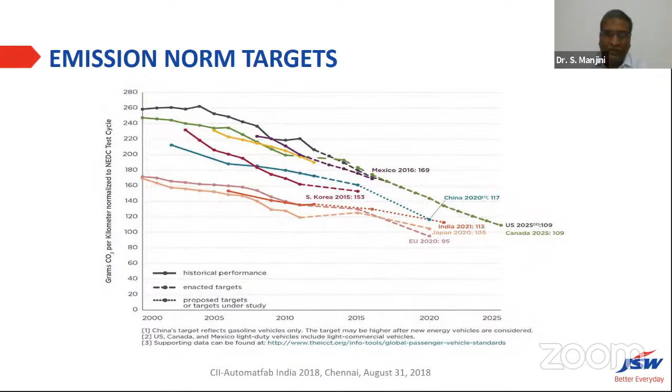But actually, if you see... I think I picked up the wrong presentation. You have to pardon me. Okay.

This is just a comparison of vehicles when we talk about vehicular emissions. The auto industry has been researching for quite some time how to reduce vehicular emissions. The first and foremost solution everybody proposes is the use of electrical vehicles. But in today's context, most of the electricity, particularly in India, comes from fossil fuel.

Of course, when the entire electricity is generated through renewable electric power sources, then vehicular emissions come down to almost one-third, where the emission is only due to the manufacturing of the vehicle.

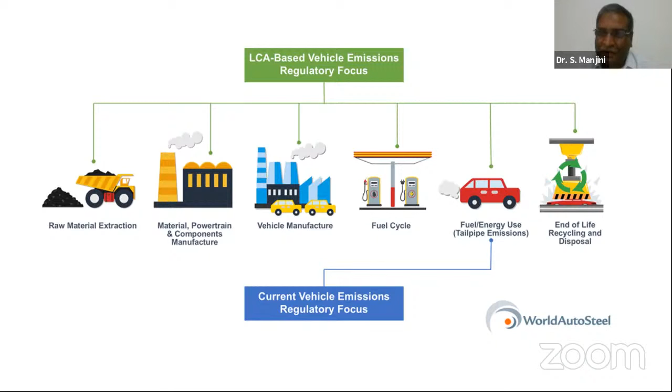So what are the various researches going on? One is the raw material usage itself. The more and more we are going in for recycling material instead of producing the material from raw ore, which reduces the carbon footprint and the extraction cost of the material. Then at the component stage, we are lightweighting the material, trying to replace the material with lighter components.

And next comes the processing of the material itself. Like for example, when you talk about steel, in a blast furnace, we use about 400 to 450 kg of coke for every ton of hot metal produced. I'm not talking about steel here, only the hot metal produced. That means every ton of hot metal we produce, we generate something very close to 1.5 tons of CO2. This is not considering the electrical power and other ancillaries required there.

So if I consider the entire steel production, starting from raw material extraction till the cold roll sheet, we generate something about 3.2 tons of CO2 per ton of steel. So the larger chunk of the carbon footprint in manufacturing comes from the steel production itself.

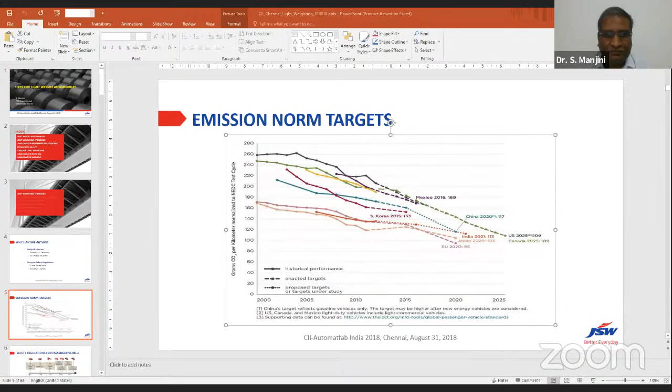Thank you, Dr. S. Manjini. It's a very interesting talk about the green environment. The subject you chose was really wonderful. You talked about waste utilization for the benefit of society as well as environment. You talked about the BS norms and the reduction of vehicle emissions. You shared the various stages where carbon emissions take place, like raw material extraction, vehicle manufacturing, fuel cycles, etc. It was a wonderful talk, especially focusing on the two industries where waste is a matter of concern, like blast furnace slag and steel slag, as well as red mud from the aluminum industry. It's a great concern for all of us to take care of this waste so that through novel processes we can convert it into useful materials. Although AMPRI has expertise in this area, we will see more in the near future. We will be developing novel processes and products useful for society and the environment. Thank you so much once again for your nice and interesting talk, sir.

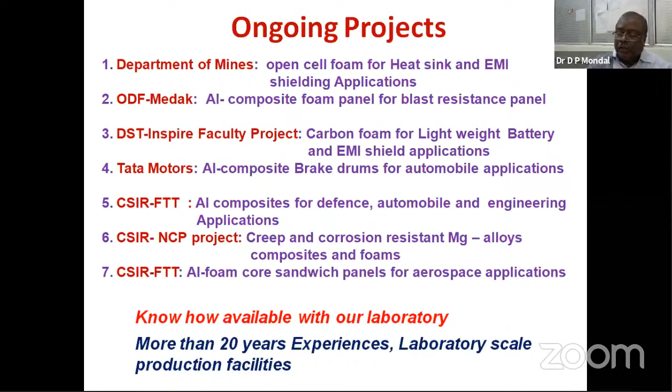Our laboratory can work with other industries, and we are in a position to give licensing of this technology, this know-how, and we can go ahead further to develop these alloys, composites and foams.

If you see, these alloys, composites and foams have a lot of applications - mainly foam is used as a crash worthiness material, and it could also be used for vibration and sound attenuation, also lightweighting of materials. We have seen that if the foam is used as a core, there is a possibility of

around 40 to 50% weight reduction for the sandwich panel or the foam filled tube. There is a need to redesign the chassis or door panels and other things if one uses aluminum foam in cars.

And we found that there is a lot of opportunity to reduce the weight of vehicles by using aluminum foams. Aluminum composites can replace a lot of steel and cast iron components in the automobile sector, and we are mainly working on development of brake drum, brake disc, and connecting rod.

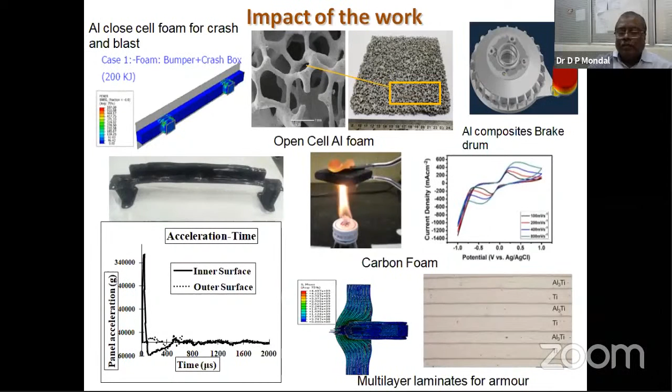As far as our human resources, we are a very small group with 6 scientists, but we are interacting with the scientists of other groups like simulation and also the metal forming and metal processing division. So in total, we are working with 10 to 12 scientists, and these are our other HR profiles. And this department has got awards like the Binani Gold Medal twice. Also 2 of our senior scientists, Dr. Das and A.K. Gupta, received the Metallurgist of the Year award for work in this area. And the other awards we have received.

As far as publications, we have a very huge number of publications in composites, metal foams, carbon foams, and magnesium. And we have filed 15 patents, out of which 5 have been granted. As far as technology transfer, aluminum composite has been transferred to Messrs. Explosive Magnesium Private Limited, Hyderabad, and hammer tips for sugar mills to SN Welding Alloys Limited, Pune, and short fiber preform for making composites through the squeeze infiltration technique, which may be used for development of pistons, connecting rods, and all these things, to Orient Siraul.

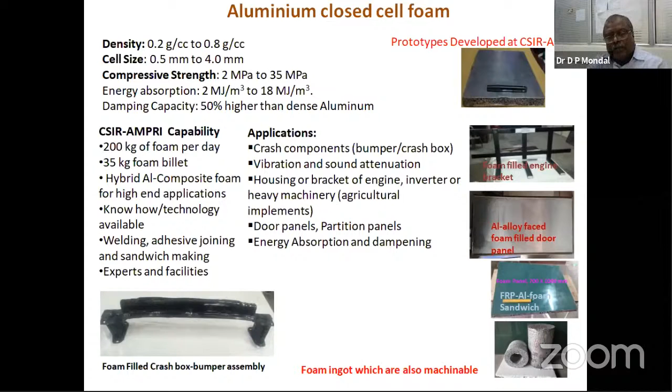Products like aluminum foam core sandwich panels, aluminum foam core door panels, and also channels filled with aluminum foam we have developed. We have made the aluminum foam filled crash box and bumper assembly, which has been tested at ARAI Pune. Property wise, if we compare, our foam is quite comparable, sometimes even better than the Alulight foam.

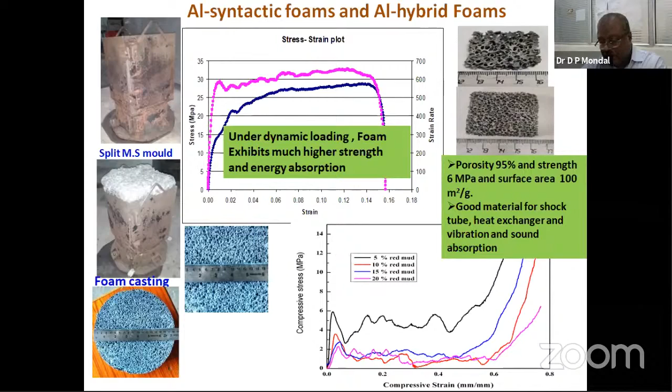And these are the tests we have conducted to see what level of strength can be achieved at quasi-static condition and at dynamic condition. At dynamic condition, the strength of the metal foam is higher than in quasi-static condition. So it can be used for dynamic conditions like crashworthiness, blast, and all these things. This has been simulated and also tested in parallel at ARAI.

At Pune we have found that around 1.5 to 3 kg of foam in an automobile's crash box and bumper can be quite sufficient against the crash when the vehicle has an accident at a speed of 55 kilometers per hour.

So that can be used, but the cost would be increased. If we use the 3 kg of foam for a big car, there will be an additional cost of 6,000 rupees. And the psychology of our people should be that they understand what they are getting using these extra 6,000 rupees, because their car and the persons on board the car will be much, much safer than what the money they are paying for the car.

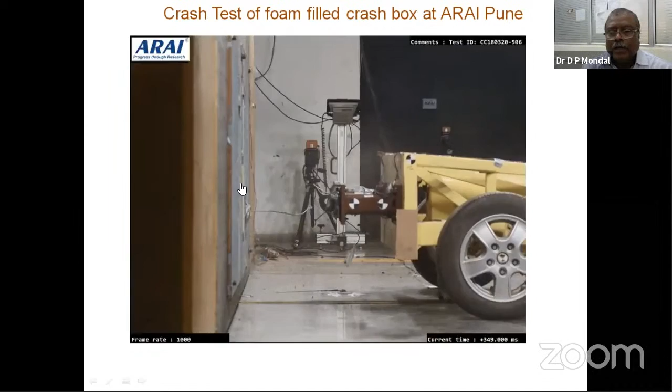And that test we have conducted at ARAI Pune with a simulated crash test, and found that the crash box absorbed the energy and nothing has happened to that assembly. But as that wall is very, very hard and strong, some reverse speed is coming, but that reverse acceleration is much, much lower than what a man can withstand.

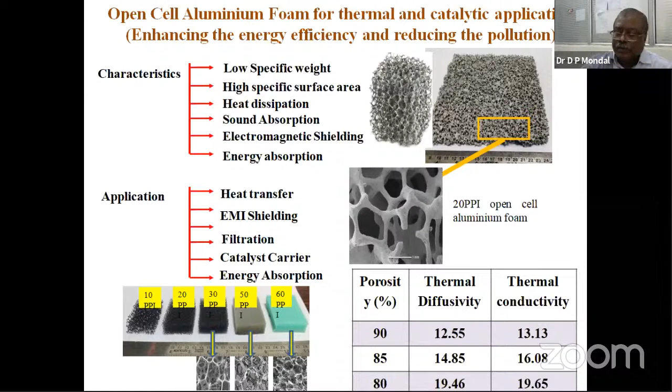And this aluminum foam has been tested for its properties, thermal conductivity and so on. And if we go by the established relations, we found that these values are quite correct as per those relations. We can think that thermal conductivity is low, but if we see, its surface area is around 300 to 400 square meters per gram. So effective extraction of heat is increased significantly. That's why this foam has a lot of opportunity to be used for heat sinks.

The aluminum composites or the magnesium alloys have several applications in automobiles and also in defense, like missiles or aerospace structures. We have the capability to make these alloys, composites, and foam, and we can have a lot of collaboration with industries to make them successful for commercial use.

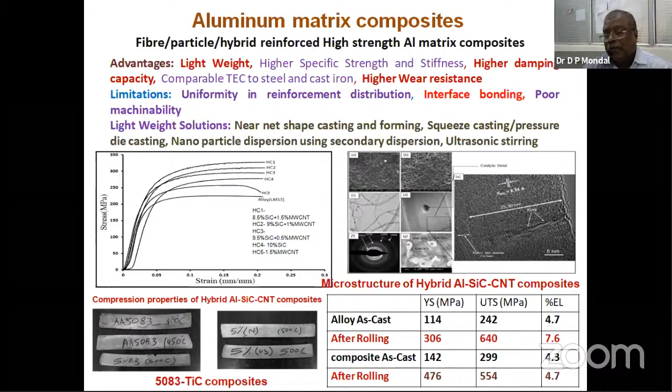And these composites, even with a particle size of 10 to 15 microns, can be rolled successfully. After rolling, the coarse particle aluminum CNT composite's strength reached 554 MPa. And I think this is quite equivalent to a steel of around 1500 to 2000 MPa.

And we have the expertise for texture and EBSD analysis, and also deformation mapping, and we have done the deformation mapping. From there we have optimized the process parameters, and then we have done the rolling of the composite using the optimized process parameters.

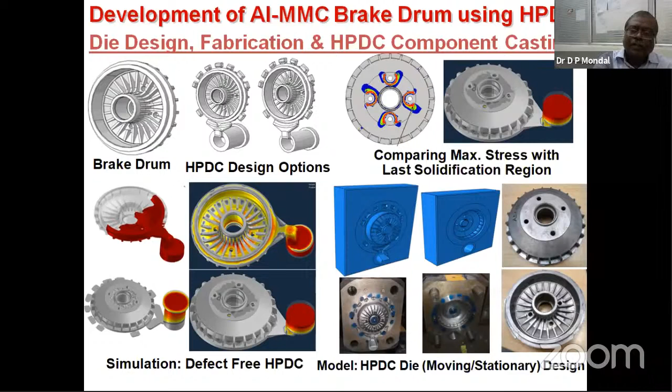From the designing of the die to the manufacturing of the component, that is the brake drum under the project of development of aluminum composite brake drum for Tata Motors that we have done, and we have the expertise in all these areas: the designing of the component as well as the solidification modeling, die designing, and pressure die casting of these materials.

The new area where we are working now is the development of hollow sphere balls, which can be used for making the syntactic foam, as well as a hybrid foam which has closed balls that can give you the closed porosity, and in between the balls there will be very fine pores which are interconnected. Those kinds of foams can be made which have much higher energy absorption and much higher blast resistance capability. It will be used also for sound and vibration applications.

But the main problem is the cost of these hollow balls. Now it is very costly. We are now trying to make the process cost effective to make the hollow balls so that they can be used for making the syntactic foam for various applications.

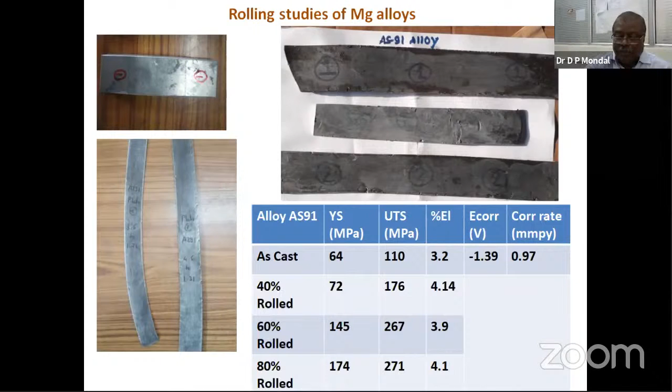The magnesium alloy composites that we have made: even the fine or coarse particles can be dispersed in the magnesium alloy more uniformly than what we can do in the aluminum alloy, because magnesium has better reactivity with the ceramic particle as compared to aluminum. This work we just initiated, and we have done the hardness measurement, and we have seen that hardness of the alloy improved by around 70% by using 10% SiC within the alloy. So its strength and stiffness can be increased significantly by using ceramic particles within the magnesium alloys.

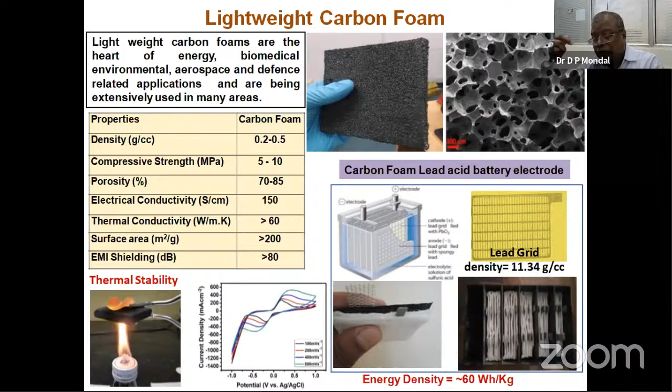This carbon foam can also be used for electromagnetic shielding for defense vehicles or aerospace. Because out of the 80 dB of EMI shielding, its absorption is around 70 dB, its absorption coefficient is very, very high. So it can be used for stealth technology. The reason it is giving this is the multiple scattering of the EMI wave; because of the multiple scattering, the radiation is reduced and absorption is increased significantly.

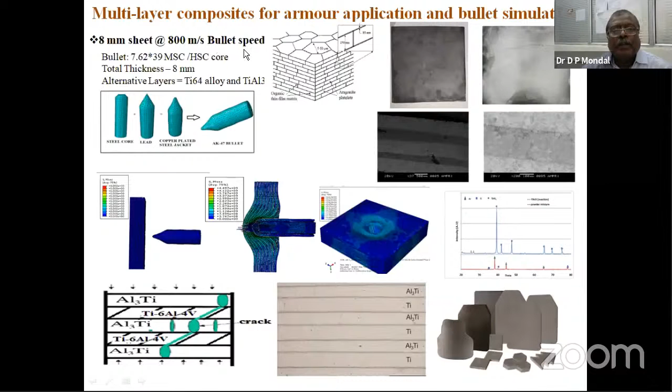And this is some work I already told about, multiple layers of aluminum and titanium for ballistic resistance application for armor. We have seen that 8 mm thickness of this can resist the bullet at a speed of 800 meters per second. That we have already tested. Now we are working in this area: aluminum foam core sandwich panels with ceramic at the front and aluminum alloy at the back for armor application, as well as blast resistance application.

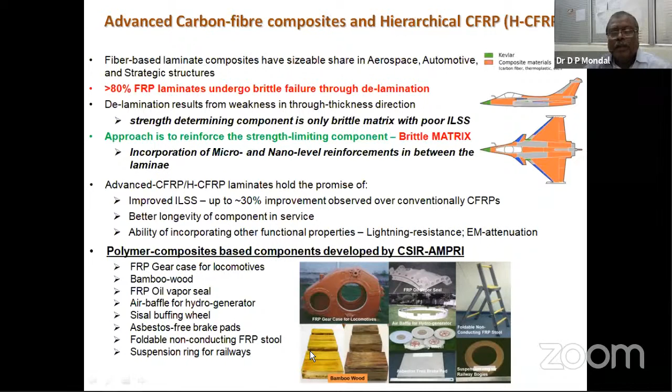Another area is the polymer matrix and polymer matrix composite. We have an excellent facility and excellent expertise of our scientists, and we have developed a number of components for BHL. Presently we are also working with bamboo composite, and this technology has been transferred to some Bhopal-based industry who are regularly making these materials, and they are one of the largest polymer industries in India.

And the other is the hierarchical composite: aluminum carbon fiber reinforced hierarchical polymer composite, fiber reinforced composite. Our objective here is to increase the strength as well as avoid debonding, and that has been successfully developed. This has a lot of opportunity to be used in automobiles, particularly for lightweighting, and also in aerospace structures.

In conclusion, we have demonstrated a number of processes, products, and materials which have a lot of capability for lightweighting of automobiles or aerospace structures. These futuristic materials at AMPRI are well recognized not only in India but internationally. In some of these materials, AMPRI may be the only lab in India working in this area, especially carbon foam and aluminum foam, the open cell metal foam. Even in aluminum composites, maybe at our level, some other lab like NIIST Trivandrum, which is also a CSIR lab, is also working.

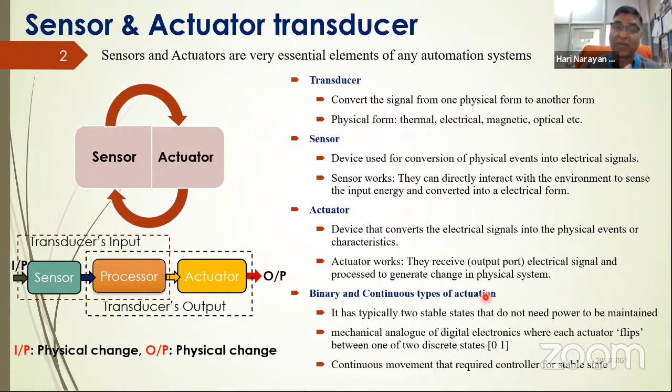Before I move to the AMPRI actuators developed here, I would like to discuss shape memory alloy. Shape memory alloy is a smart material, a class of smart material where two materials are joined together to form the alloy - nickel and titanium. These two materials blend together to form the alloy, and this alloy has a property.

It provides two stable states, which we call austenitic phase and martensitic phase. During the transformation of this material, it stores the strain generated by external force, and then while we apply any thermal, electrical, or stress process, it releases this strain in the form of displacement. While releasing the strain, it produces a lot of stress, which can be used for our actual purpose, for external mechanical work.

These properties make this smart actuator very useful for actuation purposes. Meanwhile, it also has some electrical properties. While actuating by an electrical or joule heating method, it has a change of resistance while transferring between the two phases - austenitic and martensitic. If we can properly extract this change of resistance information from martensitic to austenitic or vice versa, it gives information about their position. That's why we can use this actuator for both sensing and actuation together.

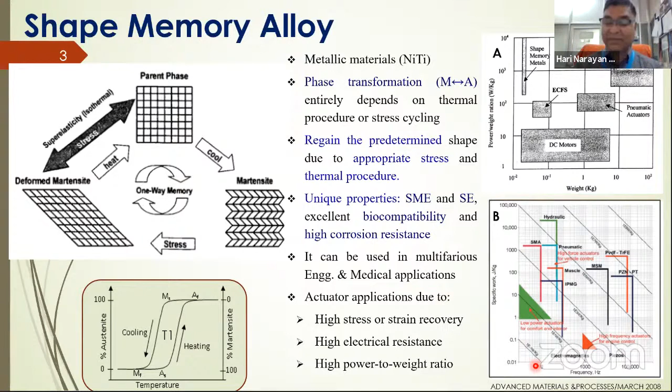So this is a versatile material for use in the coming days for any kind of application purpose. Here at CSIR-AMPRI, this department is going to work on various R&D activities, in which I just wanted to give a brief highlight about the SMA actuator.

We had developed the SMA actuator for 3D printers for micro displacement, a continuous kind of actuator. Another actuator we developed is for a prosthetic hand, which involves movement of fingers to grab any object by the human being.

This actuator is activated by EMG signals connected to the amputated hand. Thirdly, this kind of actuator can also be suitable for orthopedic rehabilitation devices, either in binary kind of actuator or in continuous kind of actuator.

The most important actuator application is for the automobile industry. Initially, we have targeted to develop an actuator for the door, central door lock and unlock system, filler inlet lock as a petrol lid opener, unlatching system, and trunk lock actuator system.

These are in the form of a binary system, because you only need latching or unlatching the system. So this kind of actuator needs a sophisticated electronic system, and we have a very good facility to develop the electronic system for the heating mechanism.

Because the actuator needs a sophisticated heating mechanism system, control mechanism, instrumentation and automation of the particular device, and data acquisition, since no sensor or actuation can work without data acquisition. We have to acquire the data, pre-process and post-process it, and accordingly develop the algorithm for actuation purposes.

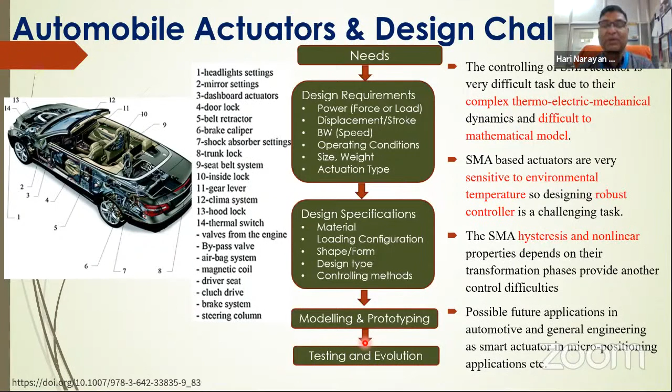Now, after the requirements are fulfilled, we have to model out and prototype the machine, then do testing and evaluation. This is the method and device for how to develop our actuators. These are the steps we have to follow for developing our own actuators, which are going to be demonstrated or discussed in the next slides.

Now, the shape memory actuators developed here. As I discussed in the previous slide, we have developed three actuators, which we can call the fuel lid and latch actuator.

This is a very common kind of actuator currently available in automobiles or cars. There are two levers present below the seat of the driver, from where the driver pulls this lever and opens the fuel lid, as well as the bonnet and trunk of the car.

This is a simple mechanism, but we can also automate the system using the very small actuator which we have available right now. So this can be fitted here. We just have a simple mechanism, simple electronics, and these are the properties of this actuator which make it suitable for this controller.

Similarly, for the door lock/unlock actuator, right now we're using the central locking mechanism using DC motors. This DC motor, which is a solenoid motor, is provided a pulse by our key. The ignition key has two buttons there for opening and closing this central locking system.

Similarly, we can replace only the gun, and the same controller can remain there, which will reduce the weight, as the four guns can be replaced by our SMA actuators.

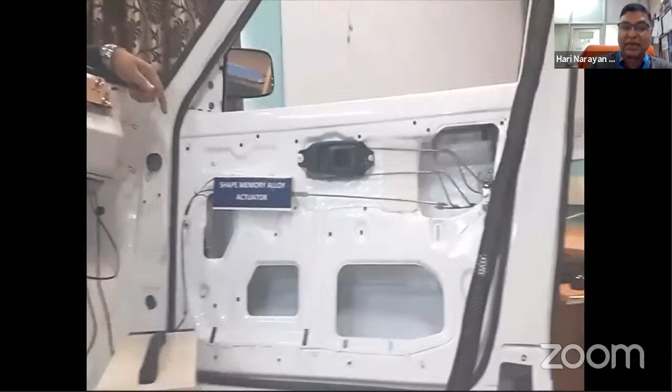This is the door locked by this control mechanism, just like our central locking mechanism. Now we try, and it's not going to open. Similarly, to unlatch it, we have provided two push button switches there, which provide the heating mechanism pulse to the control mechanism, and it unlocks the system.

Right now, presently, the device actuator is very big, but we have to replace it with a very small version, we can say 40 to 60 mm in size, with that mounting capacity.

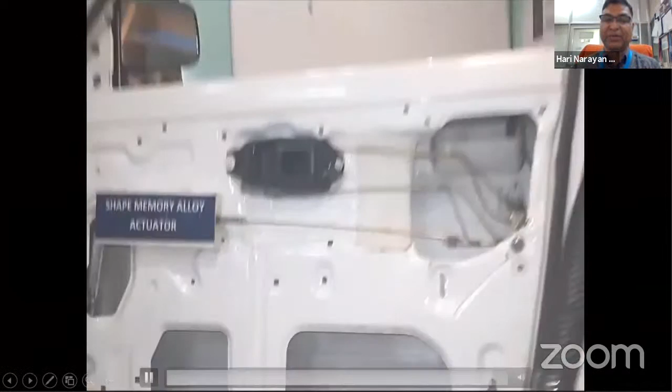This is basically a working prototype here, which we are going to demonstrate. This prototype is also lying within our laboratory.

Now I move to the second similar application for the SMA actuator for a 3D printer. In this project, the 3D printer has a printer head as well as a print pad, and the print pad and printer head have an aligning mechanism. The distance between the print pad and the print head has to be maintained, and that distance cannot be constant throughout the printing process.

That's why this is a continuous kind of SMA actuator. It can be used in the automobile industry where continuous forward and backward motion is required, for example the louvers in an AC vent, to move the vent direction forward and backward. So this kind of actuator can be suitable for that, with just a little modification to accommodate the automobile industry.

So this is our application and specification, from where it can lift a load of 500 grams with a number of elements in the forward and backward direction, and it provides an actual stroke length of around 5 mm. This technology has also been applied for a patent.

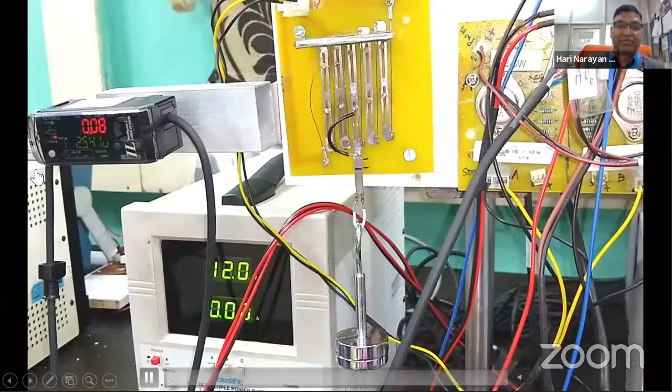This is the characterization technique which we did, and I just wanted to give a glimpse of this video. From here, this is the 5 mm displacement where we apply electrical pulses. This is the motion which will lift a load of around 100 grams, lifting it nicely against gravity, confirming a stroke length of around 5 mm to 4 mm. So this is a very good application for continuous motion.

This actuator has been mounted on the SMA 3D printer, where the nozzle is moved forward and backward through the control mechanism. Here we do not put any external sensor to sense the physical position. This is the motion where the print nozzle, from where the print material comes out in a molten state, is going to print. This actuator maintains the distance between the print bed and the actuator itself.

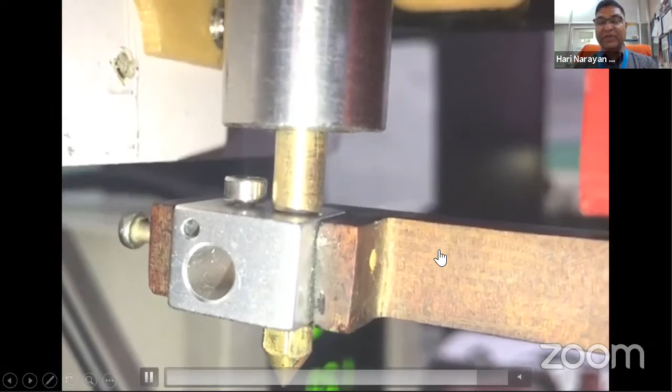Another application of the SMA actuator is for the prosthetic hand. This is also a continuous kind of actuator. We developed the actuator for the prosthetic hand and it's working well. I will give some video demo for that. This SMA actuator can be utilized for any other application, not limited to the prosthetic hand, but because this is the actuator we tested for this particular application, that's why I'm giving this example.

But this actuator can be versatile for any kind of macro position or continuous motion, for anywhere the application is required. It has a limitation of speed, but we can improve the speed.

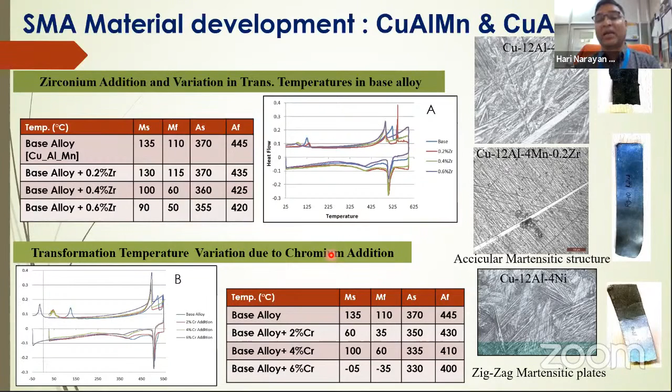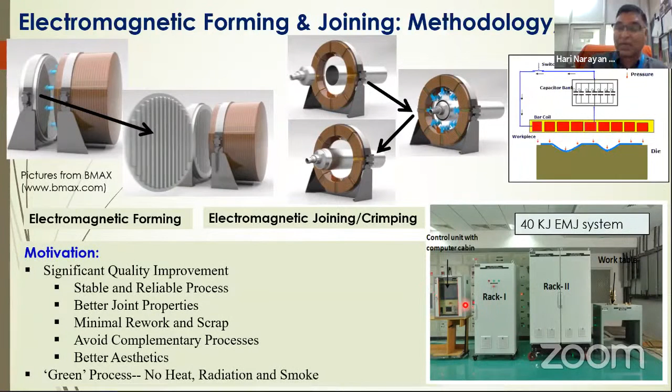This facility can develop a number of components for the automotive industry also. Some of the broad applications are defense, strategic, and automobile: automotive fuel filter, shock absorber, dissimilar joining, drive shaft, dissimilar tubes, as well as lugs for high current or high voltage applications, and sheet metal forming. We can join or weld together copper-aluminum, SS-aluminum, copper-MS, and so on.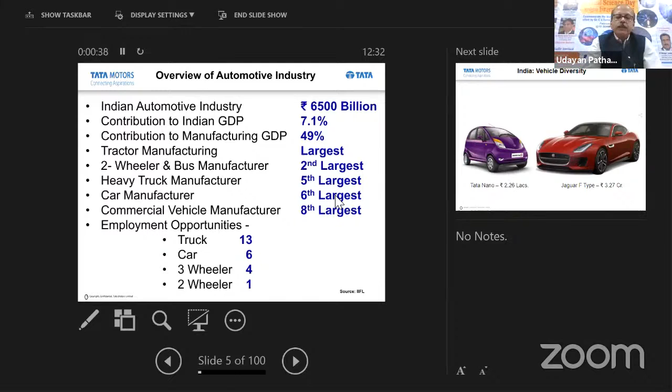Yeah. On the heavy truck manufacturer side, we are the 5th largest in the world. Car manufacturer, 6th largest. As far as the employment opportunities are concerned, for one truck, you get the opportunity of employing about 13 people, 1-3. For one car, 6 people. For a three-wheeler, 4 people, and a two-wheeler, 1 person. This includes the total, right from manufacturing till servicing and end of life.

A very diverse number of vehicles and diverse costs of vehicles are available. On one side, we had the Nano, which was costing 2.26 lakhs on the road. On the other side, the Jaguar F-Type, which is 3.27 crores. So a mix of vehicles available. A difficult kind of usage pattern. Most of these things are very common to all of us, to the extent that if I show you the next picture, which is not the reality, you will still believe this can happen in India. On the off-highway, or if I talk about the tractor industry, this is going to be the picture.

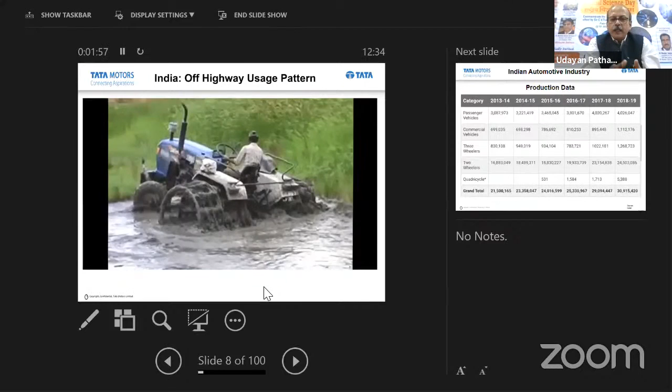This is the tractor which is used typically on the Andhra Pradesh and Karnataka border, where the rear tires are replaced by a steel cage, and this operation is called puddling. You can see the kind of operation that the tractor is doing. It is making slurry out of the mud and water to make the farm ready for the sowing of the rice paddy. This is not done only for the video shooting; this is the regular usage pattern. 90% of the tractors in that particular rice belt are doing this kind of operation.

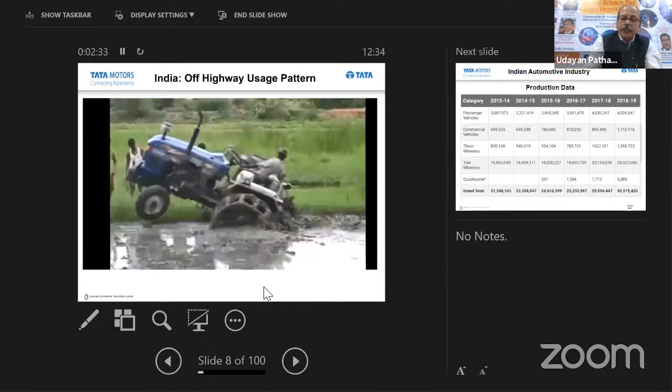And in terms of engineering application, it puts a lot of load onto the differential systems, and a lot of failures are occurring in that area. In the interest of time, I will cut short this video and move to the next. This is some of the production data for the Indian automotive industry. Intentionally, I have skipped the COVID period and I'm showing up to 2019; you can see there is a steady increase in the number of vehicles.

Also, there is a paradigm shift in customer thinking in the automotive industry. Earlier, we were talking about only transportation. Now people are talking about the mobility solution. People are talking about shared mobility, Ola, Uber, share rides; even two-wheeler share rides are very common nowadays, at least in big cities. May not be in the rural or semi-urban areas.

Then another thought that is coming, particularly in big cities like Bangalore, Pune, and Mumbai, where people are spending about 2 hours on the road going to their offices or factories, is how people can use that travel time constructively. So nowadays companies are providing buses with better seating arrangements, and people can use their laptops and mobiles for doing their job. Also, people have now started being willing to pay charges for the shared ride, not only the petrol charges, but a little more than that.

So people don't want to get worried about the parking and maintenance, cost sharing while you enjoy the driving, particularly from Pune when people are going to places like Nagpur and Nashik, etc., where the normal tickets of the buses, sleeper coaches, which are typically in the range of 1200, at the time of Diwali vacations soar as high as 6,000 rupees. Even the aircraft tickets, which are about 3,000 rupees, go to about 15,000, 16,000.

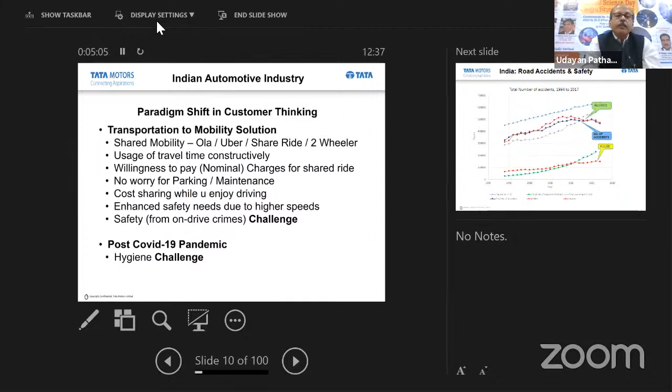Also, one of the things that has happened is even in and around Bhopal, you can see a lot of road infrastructure has improved across India, not only in Bhopal. That increases the speed of the vehicle, which calls for enhanced safety needs. And of course, with all these shared vehicles like Ola, Uber, etc., safety from on-drive crimes is another challenge that is being faced. And post COVID-19 pandemic, hygiene is becoming a challenge, and that is the challenge which the automotive industry is facing.

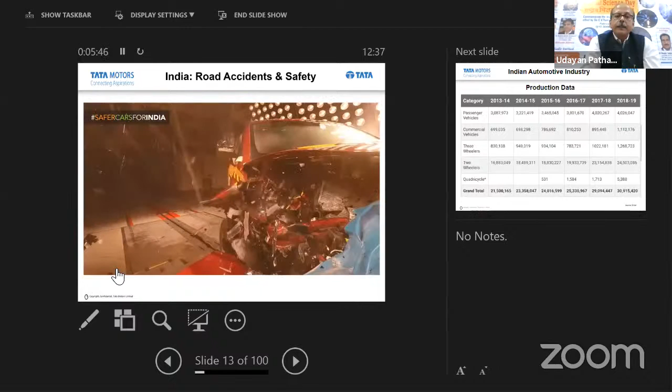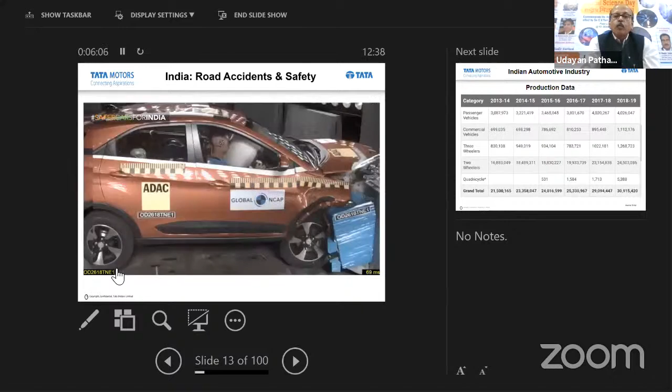So with Global NCAP, Indian vehicles are meeting safety norms. The accidents are artificially made at 64 kilometers per hour. These are intentionally controlled accidents done inside Tata Motors, and you can see the reaction of the vehicle and the reaction of the passenger sitting inside. There are specific cameras which have the capacity of 1200 frames per second. Whatever you are seeing is what in common language we call slow motion. But in reality, this happens in a fraction of a second.

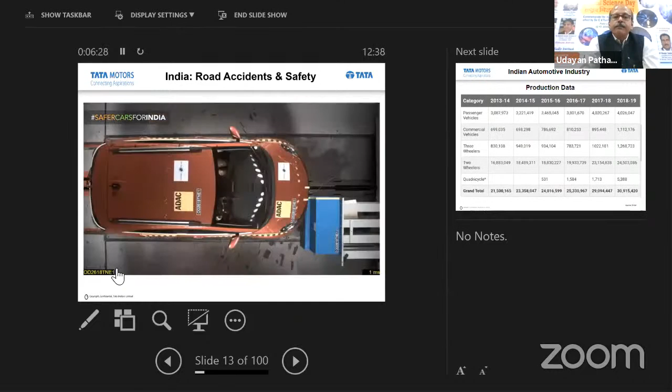You can see what is happening to the occupant and how they are protected, what happens to your vehicle, what happens to even your child occupant, etc. These are real kinds of accidents which can happen on the road. So again, in the interest of time, I will skip this full video.

So the Government of India has come out with a clear-cut policy. Our minister has declared that they want to go with alternate fuel; whether automotive companies want to align with them or not, they would like to go ahead. And some time back, my other colleague, Dr. Manjini, shared the same data which I'm trying to reproduce.

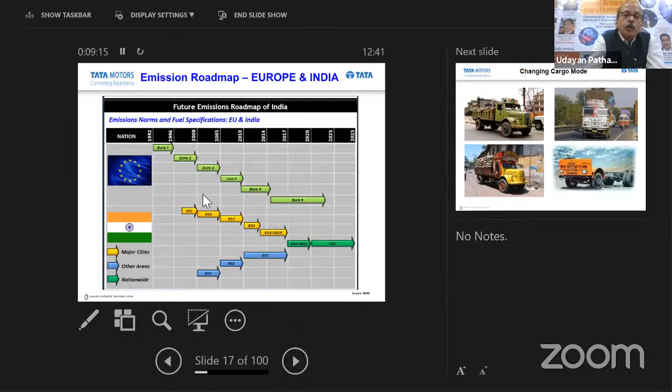Also, there is a changing mode of cargo. Vehicles like this, as you have seen, were moving all across the country. Then came the 407, which was popular for going inside the cities. But with further congestion, the model has changed: between cities, people are going for big trucks with containers and trailers, and inside the city, within the limits of the municipal corporation, small vehicles are providing the last mile connectivity.

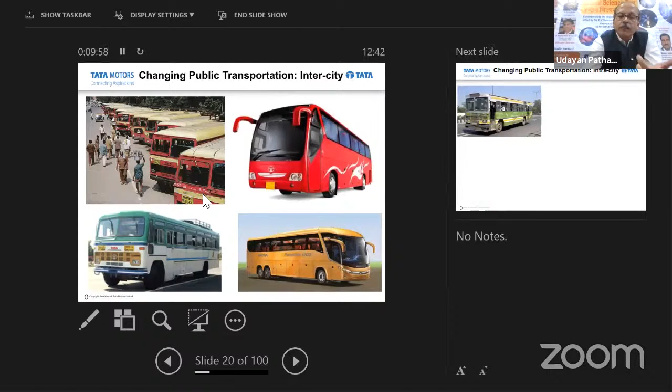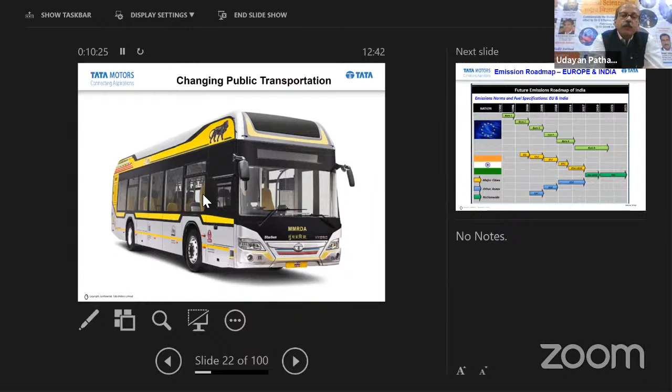Same thing is happening in passenger transportation, intercity and intracity transport. These pictures are from Maharashtra, where buses are being replaced by luxury buses. Even this DTC bus is for intracity travel, and now these kinds of buses are being plied on the roads of Delhi. Even in Bhopal, these kinds of buses are seen nowadays, along with different cargo modes that are available. Even electric vehicles are plying on MMRDA, the Mumbai Metropolitan Region, and you can see these electric vehicles plying. Even between Kanpur and Lucknow, these buses are plying as intra-city buses also.

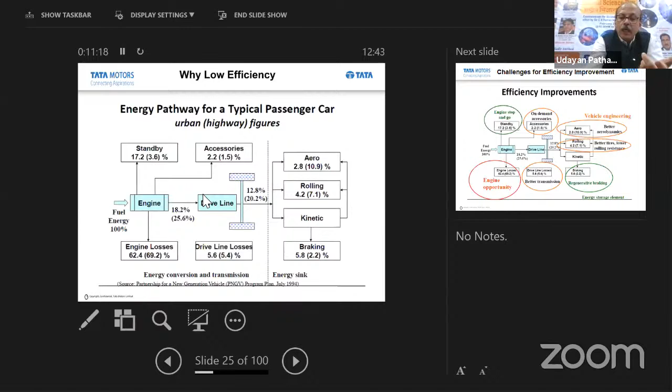This slide I would like to talk a little more about. Why is this low efficiency being talked about? If you talk of the engine, it involves different numbers. In the standby mode, in the urban driving cycle, it talks about 17.2%, whereas the bracketed figures are highway figures. These are the energy consumptions in different systems and subsystems of the vehicle. There are aero losses, rolling losses, kinetic losses, braking losses, and driveline losses. So different losses are there which people are trying to map, and accordingly people from the automotive industry have started working on it.

The ones shown in green have really achieved a breakthrough, such as engine stop-and-go, where we could achieve drastic improvement, whereas in other areas there is only a little improvement. In the case of braking, because of regenerative braking, an energy storage element has come into the picture, and there is actually a creation of energy because of regenerative braking, etc.

Coming to the need for electric vehicles: very clearly, environmental considerations, climate change, fast dwindling petroleum resources, and high current account deficit owing to the huge oil import bill, as I showed in that graph. Then there is a worldwide shift to more efficient drive technologies and fuel-efficient systems. But in spite of that, IC engines are still considered inefficient, and accordingly battery electric vehicles and hybrid electric vehicles have emerged, with their motivations and drivers, migration journey, types and classification, and change content.

This is what we are going to talk about. These are the typical classifications of hybrid and electric vehicles.

If I talk about the first, it is the IC engine vehicle, where the emission is CO2. Then we talk about the parallel hybrid electric vehicle, where there is CO2 emission but in a reduced quantity. Then the range-extended EV, where again partially there is CO2, but the range is extended. Then bimodal, that is independent IC and electric drives both provided there. Then the fuel cell electric vehicle. And if I talk about the zero emission vehicle, it's totally clean — you can see there is no CO2 emerging out of it.

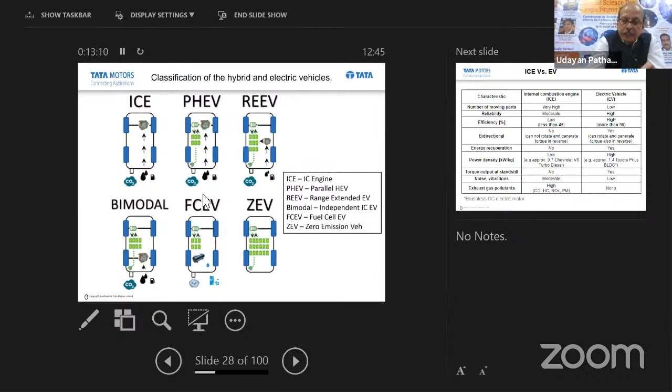When we talk about different characteristics, comparing the IC engine and electric vehicle: the number of moving parts in IC engines is very high, whereas in electric vehicles it is very low. Reliability of IC engines is moderate, whereas in electric vehicles it is very high. Efficiency of IC engines is low, less than 45%, as I told.

And whatever this 45% figure I am showing is with all the improvements that have globally happened. Whereas in the case of electric vehicles, it is more than 90%, even at the crude stage, and there is some opportunity available for improving this further. Then bidirectionality — in the case of IC engines it's not possible, whereas in electric vehicles they are bidirectional. Then power density — again, I have compared two global models, Chevrolet versus Toyota Prius, which uses the brushless DC motor.

The torque output at standstill is not possible in IC engines, whereas in electric vehicles it's possible. Noise and vibration is another area — in the case of IC engines, even with all the different materials developed, like those by AMPRI, we could reduce the noise, but it is still moderate. Whereas in electric vehicles, it is so low that people complain they don't realize there is a vehicle standing behind them. So can we add some noise into it? In fact, it's happening the reverse way, so that is another challenge here.

Then exhaust gas pollution — again, as I said, in the case of IC engines it is CO, HC, NOx, particulate matter, which is high. And in the case of electric vehicles, the vehicular pollution level is very, very low.

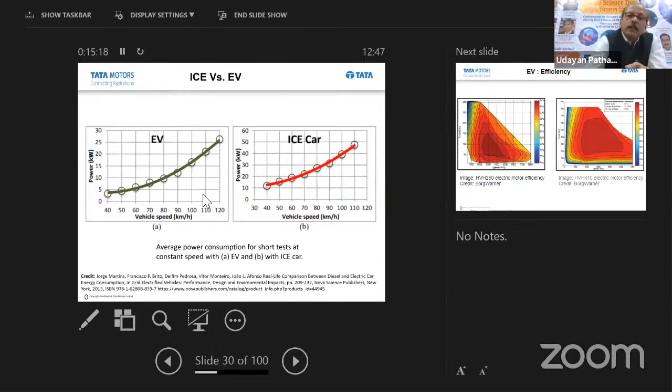Whereas the same change is possible with 25 kilowatt in case of electric vehicle. These are some of the efficiency graphs of electric vehicle. You can see with higher electric motors, the area having maximum efficiency is increasing, close to 94%. This is from Borg-Warner, which is international.

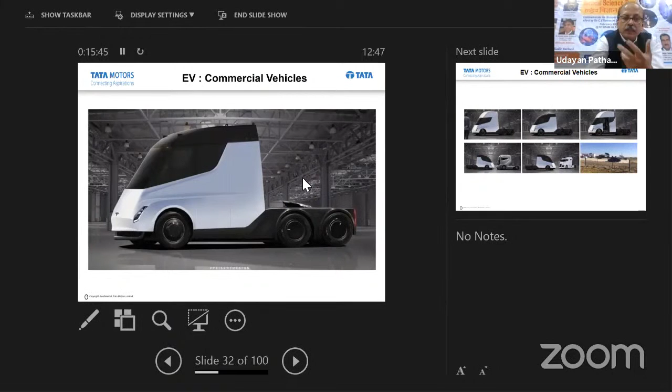In case of electric vehicle, we think it is only buses and trucks, buses and cars that are coming. But Tesla is now coming up with this kind of cargo trucks, very, very high cargo trucks. You can see the testing happening in US, etc.

With this, there may be a question in your mind: when really was the first EV made? You may like to guess, but again, in the interest of time, I will move ahead.

In the 1800s, the electric engine was introduced for the first time, and it was very quiet, slow speed, not scaring to horses and people. That was the requirement at that point of time. This was in London in 1883.

These are some of the later designed cars, some of the car prototypes made by Henry Ford and Thomas Edison, two legendaries.

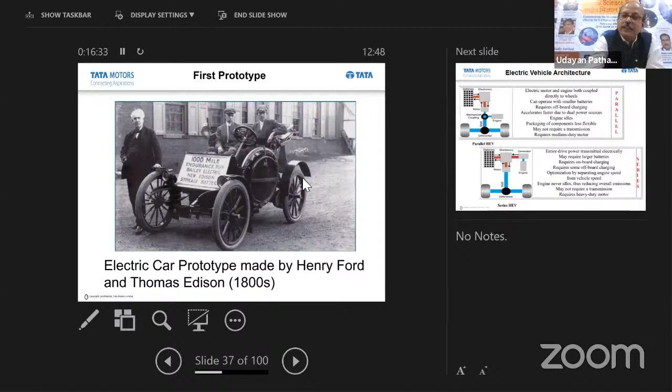Coming to the vehicle architecture, there are two parallel kinds of things: that is parallel and hybrid, or series, we can say. You can see very clearly there are two streams coming differently - that is series hybrid and parallel hybrid. That is the difference that is coming out.

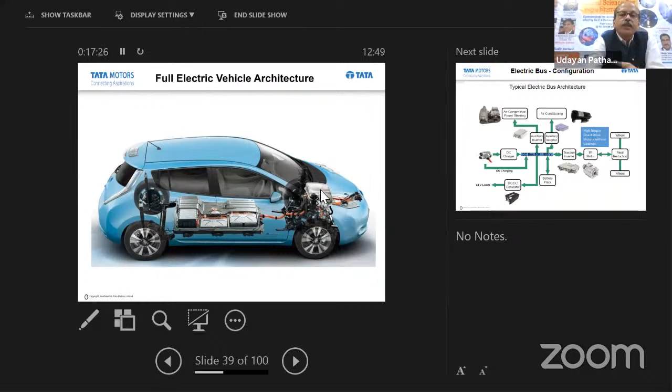If you consider the thing shown in orange color, that is the electric vehicle power flow, whereas the one shown in slightly darker color, that is the IC engine vehicle typically. The other part which is slightly brighter are the batteries and electric storage parts, etc. Then on the bonnet side, instead of engine, there is something called power system unit, which is ECU, engine control unit, which will control the engines.

Coming to the electric bus configuration, we'll go in a little more detail. There are various systems on the chassis, like auxiliary drive, junction box, then auxiliary inverter with DC-DC converter, etc. Then there will be traction motor, traction inverter. Those are the things which I have shown here.

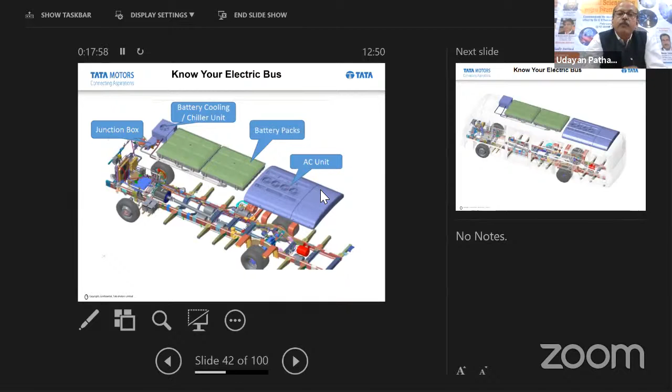When we talk about the roof, there will be battery cooling or chiller unit. The battery packs will be on top, and of course the AC unit is also going on top of the vehicle. So this is how your electric bus will look like.

The global scenario on electric vehicles: the global electric car stock surpassed 5 million vehicles in 2018. You can see the number. Various countries such as Norway, Netherlands, Germany, France, UK have set targets of migrating to total electric transportation between 2030 to 2040. Our country, India, also has focused on electrification of transportation.

Various vehicle manufacturers such as Volvo, Daimler, Volkswagen have announced plans to go only for electric powertrain for future models. That means they have stopped the development of new engines in the world.

As per the forecast by International Energy Agency, the electric stock will be around 70 million by 2025. World Bank already stopped the financing of upstream oil and gas projects after 2019, and they have raised funds to finance the shift towards clean energy. So oil exploration and oil refineries will not be funded by the World Bank anymore - it's already stopped in 2019.

Global electric bus stock: the authentic figures are available from 2008 up to 2018. About 4,60,000 buses are available globally. Of course, China accounts for 99% of the global market of electric buses. Shenzhen city operates the largest fleet of 16,000 electric buses in the world.

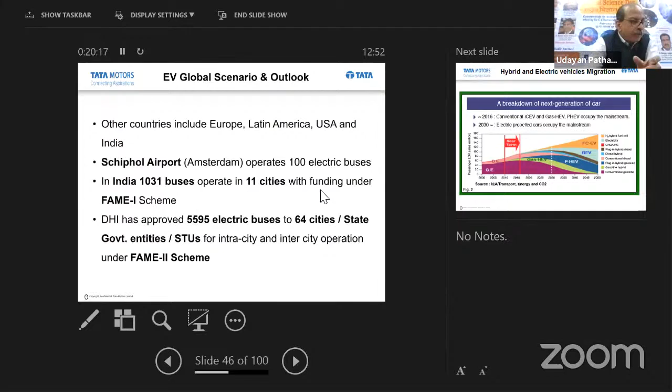And it's not only the number which are on paper, but these are the actual reality that's happening. If we talk about the kind of distribution of vehicles which is going to happen, around 2050, most of the vehicles you will see will be fuel cell electric vehicles. There will be some battery electric vehicles, some plug-in hybrid electric vehicles, and gasoline engines will practically be dead. That is what is expected.

Then if we talk about electric vehicle content, I have tried to compare the gasoline vehicle system, what is their function, and what it's getting replaced by in the electric vehicle. So the gasoline tank, which stores the energy to run the vehicle, will be replaced by the battery. The fuel pump, or gasoline pump, which replaces energy to run the vehicle, will be replaced by the charger. Then the gasoline engine will be replaced by the electric motor.

Then the carburetor will not be there; instead there will be a controller. There will not be an alternator, but there will be DC-DC converters and DC to AC converters, which have no equivalent system available in the gasoline vehicle. And smog control is required in case of IC engine vehicles because there is toxicity in the exhaust gases. In case of electric vehicles, the toxicity will not be there.

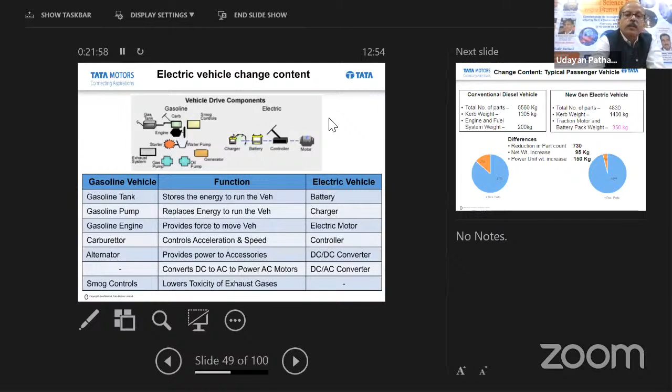If I talk about the number of parts, whatever I've shown today before this slide was kind of qualitative. Here I'm trying to get the quantified data, and the total number of parts is going to be 5,560 for a conventional diesel vehicle, and this is not kg, it is actual numbers. Curb weight is 1,305 kilograms.

Whereas in case of electric vehicle, it will be 4,630 parts, and you can see there is a weight penalty, going up to 1,400 kg. One of the reasons is the battery pack weight instead of the engine and fuel system, which is about 200 kg in the conventional diesel vehicle, particularly cars and SUVs I'm talking about. The new generation electric vehicle battery pack weight itself will be 350 kg, so there will be a penalty of about 150 kg on this.

The reduction in part count is 730. Net weight increase is 95 kg. There's some offset happening, and power unit weight increases by 150 kg.

These are some of the phase-wise manufacturing programs which the Government of India has proposed. Again, in the interest of time, I will skip this.

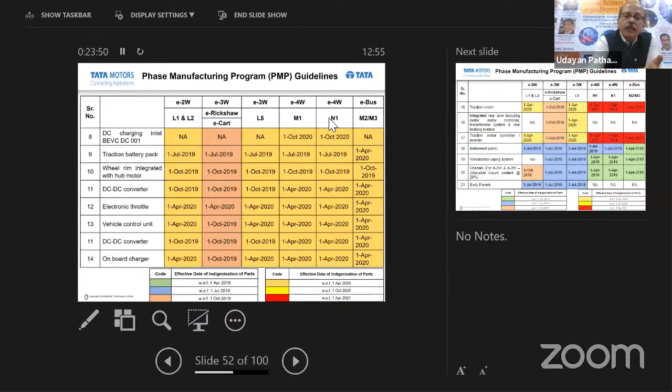This is trying to show how the government has planned a phase-wise manufacturing program for different systems, to make sure that for electric two-wheelers, electric three-wheelers, electric four-wheelers, and electric buses, these parts and systems will be developed and localized in India under the Atmanirbhar Bharat scheme. These are some of the dates shown, and except for those in the COVID era, which got delayed, other dates are being honored as of today.

Again, the same thing: there are about 21 systems which are being localized. Then India's new EV program, the government is focused on the electrification of transport, as I said earlier.

Early EV penetration in the transportation segment includes e-rickshaws, e-autos, e-taxis and buses. In Bhopal itself, we can see there are a lot of e-rickshaws, and I guess a lot of cities in Madhya Pradesh also have these kinds of vehicles available. Then EESL has floated tenders for 10,000 electric sedan cars and 2,000 Bharat EV chargers in the market.

The infrastructure is getting available. The Department of Heavy Industry has introduced the expression of interest for STUs, state transport units, for electric bus operation and public charging stations. Another thing being talked about is the swappable battery, which is a separate vehicle and energy business, and how private vehicles can leverage this ecosystem. That is the focus of the government.

Also, there are some innovative business models coming up, like swappable batteries versus fixed batteries. Recently, the government has passed a resolution that even electric vehicles can be booked without the batteries in them. Batteries can be bought separately.

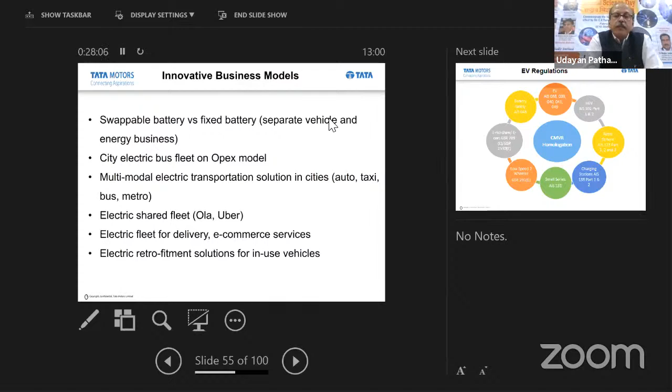Then there's electric retrofitment solutions, for the in-use vehicles, because we already have a lot of vehicles in our country, so we just cannot throw them off. So people are talking about electric retrofitment. Bharat Forge is working in a big way on this particular kind of technology.

Of course, when there's a new changing technology, it has to have regulation, because we are talking about electric vehicles and they have a lot of energy stored in them. If I talk about the kind of energy, it is almost as good as a 1-ton bomb you are sitting on. But let me tell you, it is very, very safe.

There are a lot of safety regulations, what we call CMVR homologation. Tata Motors or any automotive manufacturer in India, or rather in the world, cannot bring their product without getting certified from agencies like ARAI, etc. So there are a lot of stringent safety norms being provided, and standardization is being done. These are the different electric vehicle regulations being used. I have given the comparison of Indian standards as well as international standards.

Again, charging regulations are coming. There can be AC conductive charging, or there can be DC conductive charging. Both types of chargers will be available, and again, each has some plus points and minus points.

This is a very common picture. When we were first introduced to lithium-ion batteries, we had different kinds of chargers. I myself had an iPod at some point, then I had a Samsung, then mini USB and Sony Ericsson. So instead of having 3 or 4 different kinds of connectors, I used to buy this 10-in-1 USB charging cable. But remember, that was about milliamperes, and in the case of electric vehicles, we are talking about kilowatt-hours. So there's a huge change in the energy, and these small cables will not work out.

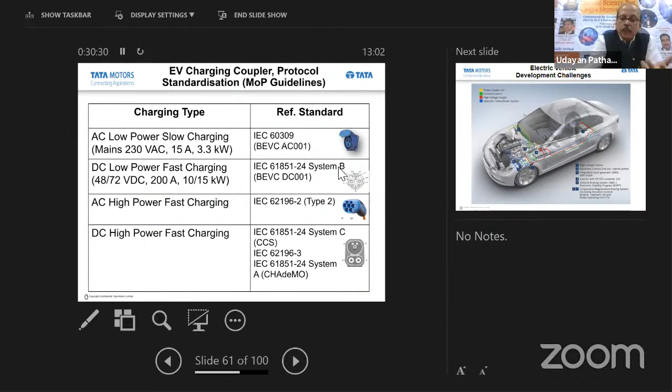So standardization is happening, and these are various reference chargers being used, particularly for charging coupler protocols. In India, the last one, called CHAdeMO, is particularly adopted for DC high power fast charging, and that is being standardized all across India.

Then, regarding development challenges, there are a lot of opportunities available in terms of high efficiency batteries, electronic control units, motor generators, DC to DC converters, and DC to AC converters.

These kind of opportunities are available. I will just show the EV powertrain development cycle.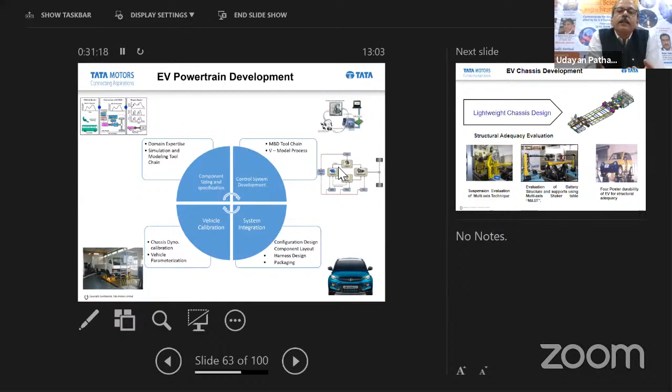It starts with the domain and domain expertise, then the simulation and modeling tools chain. That is the first step. Then we migrate to the actual tool chain, then model process, then the actual configuration of the design, harness design and packaging, and finally productionizing. So these are the various steps into it.

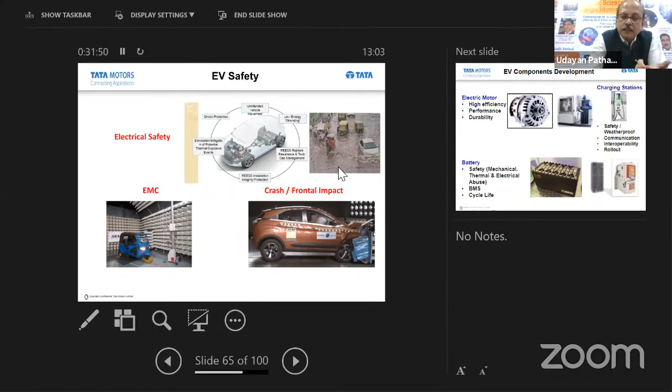In the electric vehicle, lightweight chassis design is happening, and I think AMPRI can definitely contribute in a big way. ARAI is working on structural adequacy evaluation particularly on this. Then there's electrical safety and EMC - sometime back Mr. Bhargava indicated about the EMC readiness which AMPRI has, so those can be leveraged.

These are the various EV components which are being developed and will be developed very soon. These are the business opportunities that will be available - electric chargers, particularly. If you go to automotive companies producing electric vehicles, in their dealerships you will find this kind of structure already available, and very soon these kind of structures you will see even at petrol pumps. Again, the most important thing required here is the training of users and drivers.

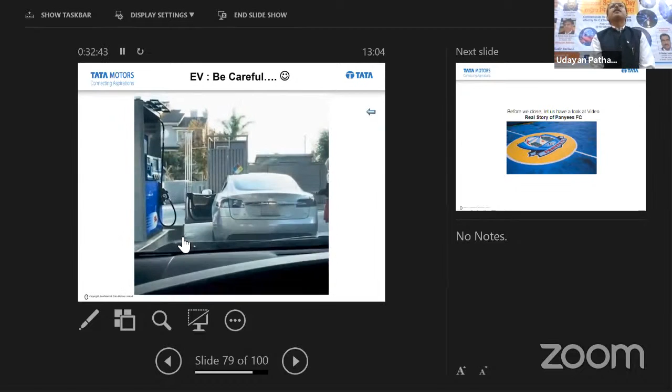I am going to show a small video. This is a video of a lady, but don't laugh - it has nothing to do with gender, but this is the reality. When you don't know, when you're migrating from a diesel or gasoline vehicle to an electric vehicle, and you get the indication that your fuel is towards the end, and you go to the petrol pump or fuel pump, what will happen? You can just see the reaction of this lady.

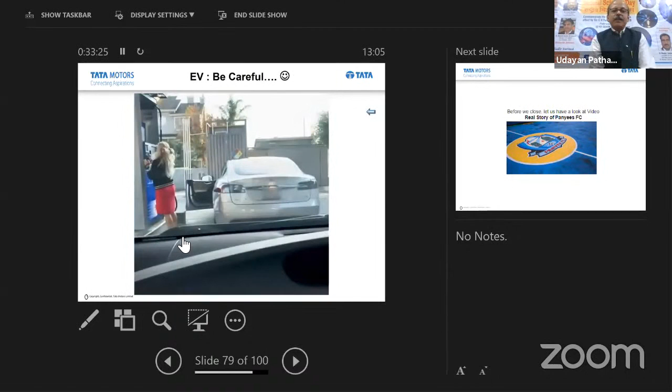In the US particularly, you have to operate the pump yourself because the cost of labor is very high there. So try, see how that lady is trying. Now she opened the lid, somehow she could find it. Then she swiped her credit card so that the adequate fuel can be dispensed. And now she's in a fix over where to fill in the fuel. Probably this is the Chademo charger which I have shown you - of course it cannot accommodate the fuel pump nozzle.

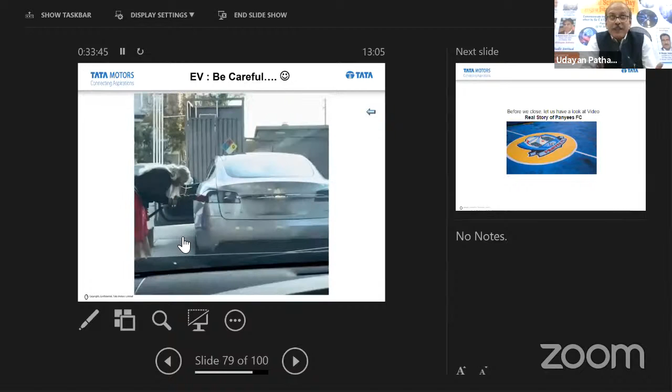So anyway, this is what I'm trying to tell you. In the interest of time I will not go for the full video, but these are the kind of training needed for drivers as well as users - the training is very, very essential. Even for fire personnel, training is required on how to handle fires in these vehicles if it happens.

Also for insurance claims, people need to be trained. Then for the legal machinery, how those legal activities will be taken. Forensic experts in case of accidents, particularly if certain scams or deliberate crimes happen, need to be trained. And then electricians and roadside repair personnel, because even with whatever reliability is there, there is a need for roadside repair that may come up.

Then there's the charging infrastructure. Two types of charging I have shown here - AC charging, or what we call onboard charging, and standalone DC charging. DC charging will be fast. Then these are the different charging methods - for buses there can be what we call an arm which can go up, a pantograph, or otherwise there can be swappable batteries.

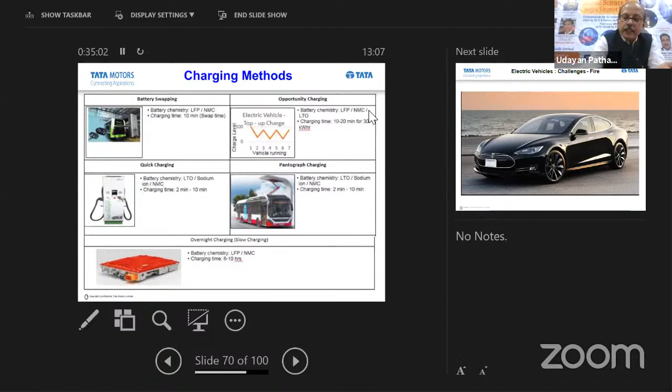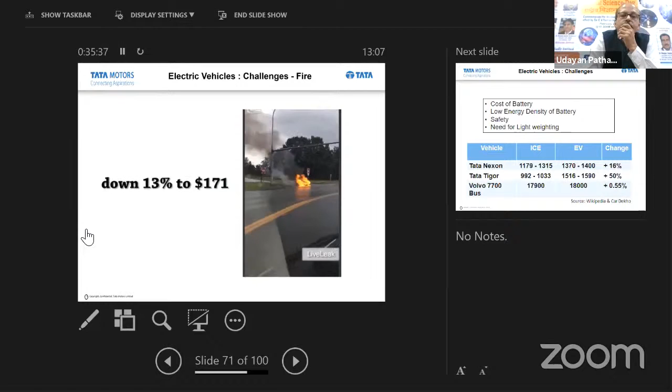Its stock has soared this year, with investors juiced by the prospect of growth in electric car sales, but it hit the brakes after this video emerged of its Model S burning in flames. The first thing you need to know is the battery pack of the Model S is located in the floorboards. The accident took place as the driver was heading south on State Highway 167 in Washington State. He apparently hit some metal debris in the road. The motorist decided to pull off the highway and the vehicle became disabled. He began to smell something, and shortly after, the front part of the vehicle caught fire. Firefighters arrived, but the fire reignited, requiring several attempts to extinguish. Tesla has reviewed the accident and says the flames were contained to the front part of this car due to its design and construction.

So with this, coming to the challenges: the biggest challenge is the cost of battery, low energy density of battery, safety, and need for lightweighting. I have compared the weights of different vehicles. The source is Wikipedia and Car Dekho. These are not the official data.

So in case of Tata Nexon, which is IC engine, depending on the model and the systems you are choosing, it can vary from 1180 to 1315 kg, whereas in case of EV, you will find there is a positive change, that is, there is a penalty of about 16%. In case of Tigor, it is almost 50%.

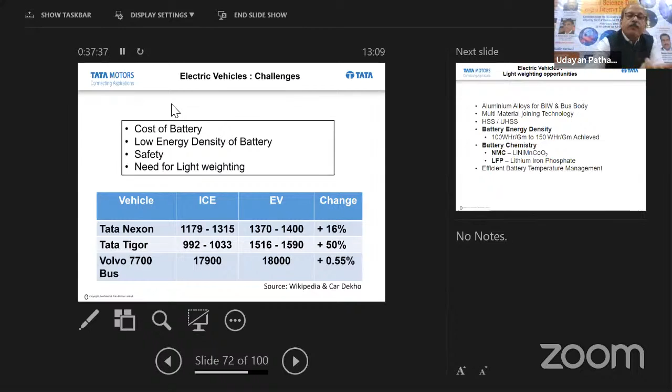Then aluminum alloys for BIW and bus bodies are required. Multi-material joining technology will be required; multiple materials can be required to be joined. Use of high-strength steel and ultra-high-strength steel is required. Battery energy density from 100 watt-hour per kg to 100-150 watt-hour per kg we have already achieved. But again, this is very small compared to the requirement of the day.

Also, there is a challenge in the battery chemistry. NMC, or lithium nickel manganese cobalt oxide batteries, are very popular. But there is a challenge of temperature in this. Very suitable for the European environment where the temperatures are low. But in tropical countries like India, the battery management is becoming a problem, and that also adds to the cost and weight of the vehicle.

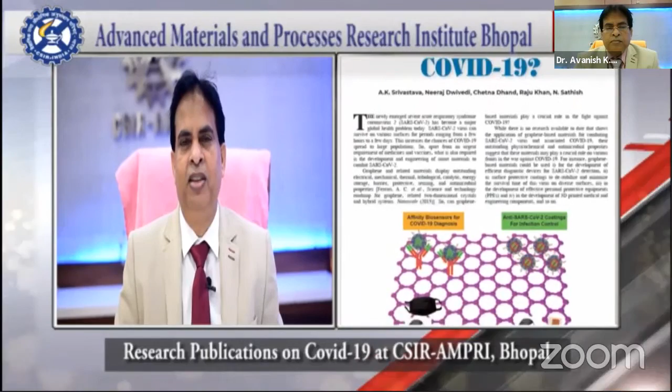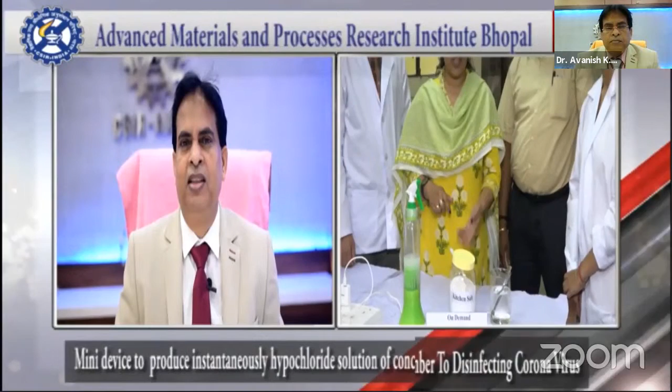In terms of knowledge generation, we published some very important papers in international journals, including considering the nanomaterials of graphene, and we are probably the first in the world to publish in Science Reporter saying that graphene can work as a protection material against coronavirus. Other publications were on antimicrobial coating, biosensors, medicinal plants and so on. Then we did knowledge dissemination like organizing conferences, workshops, training people and also making them aware how to protect and prevent themselves from COVID-19.

We had these programs under Jigyasa, teaching the school students, their parents, their teachers, their deputy commissioners, principals, and under the skill development program, certain programs we have run. Then we interacted with society in terms of teaching them or making them aware how to protect themselves from coronavirus. In this case, we reached more than 50 villages of Madhya Pradesh and Chhattisgarh. We distributed masks, sanitizer, soap and posters making them aware about the coronavirus COVID-19. We also distributed soaps, masks, sanitizer and posters to government officials like police personnel, bank officials and the common man.

Then further we worked on different products and technologies we are trying to develop, and we started with face mask and sanitizer with extra skin care. This technology we transferred to a startup company in Indore, and I am happy to tell you that the face mask is already in the market. It is commercialized after lab testing, and sanitizer work is going on. In addition, we are working to develop different sanitizer boxes with UV and nanomaterials, hybrid boxes, and without UV with nanomaterials. We are developing some other products like biosensors and so on.

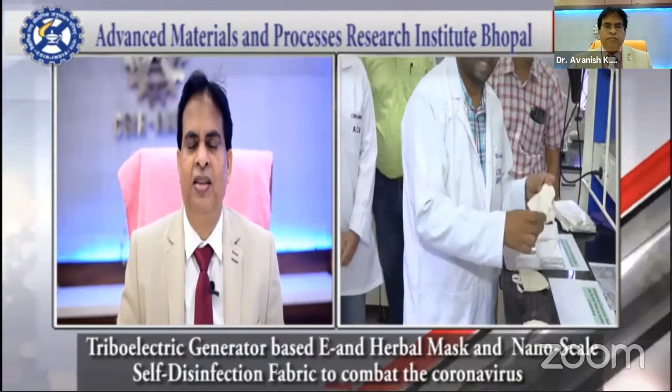Then we are working on different other products like high quality masks such as e-mask, triboelectric mask, herbal mask, graphene layer incorporated mask for different sectors of people, not only the common man, but even doctors and other healthcare people. So, in total, we are working in different fields. We are developing an antimicrobial coating to protect ourselves from COVID-19 coronavirus, and this coating can be used on different metallic surfaces, and therefore one can protect oneself.

So, in total, in 5 directions: knowledge generation, as I said, knowledge dissemination, societal interaction, industry interface and innovative projects. In all these directions our scientists, technical staff, non-technical staff, students, project fellows, we are working in one team, and we are also getting associated with CSIR as a whole. CSIR as a whole also has 5 pillars where they are working in different directions, and we are associated with hospital assistive devices among the 5 pillars of CSIR.